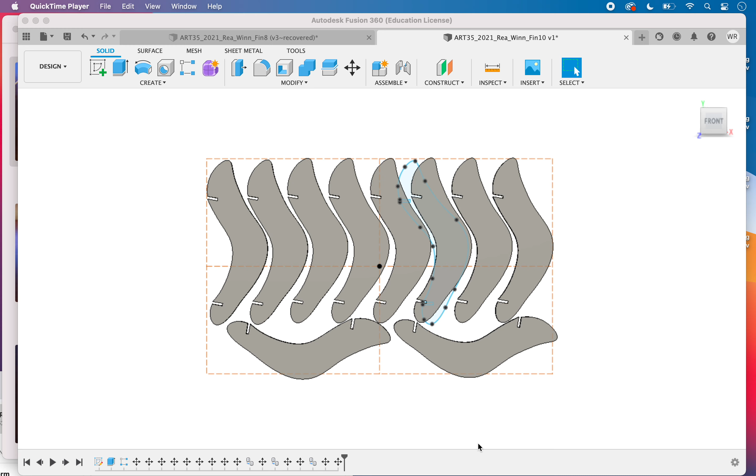The last time we were working together, we patterned the fin unit. We made 9. I've added a 10th, and I do recognize we're a tiny bit over the line, but I'm hoping there's enough margin that the laser cutter will still be able to work with that. Let's go ahead and start taking this digital model and prepare it to become a physical model to be cut out on the laser cutter.

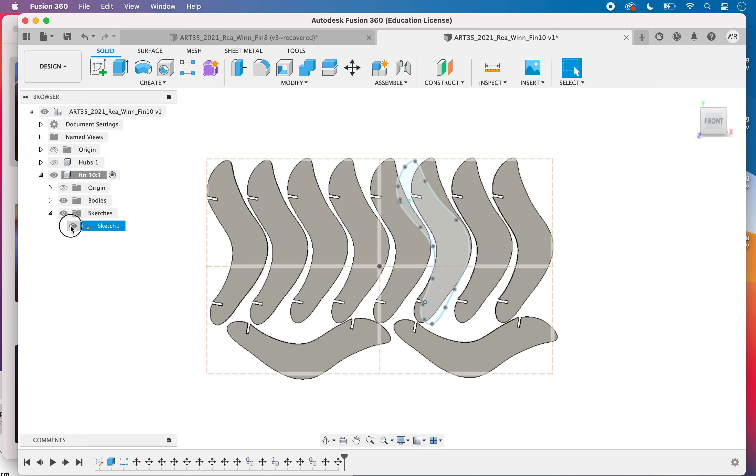So first of all, I want to come in here and drop down any layers and turn off the sketch so that it makes it more clear for us as we move into the manufacture space. So here in the manufacture space, you will see we have setups, and the first thing we'll do is do a new setup.

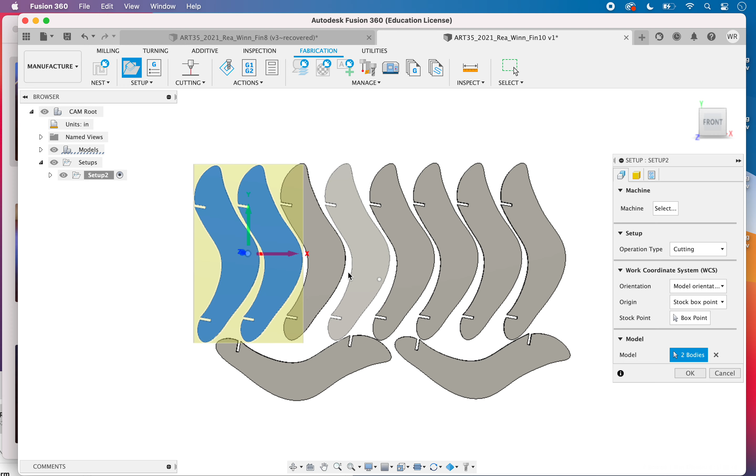And we want to verify the operation type is for cutting. And we'll come down and say which model do we want. We'll click on each fin. And then we need to go to stock, and where it says stock offset, let's say no additional stock.

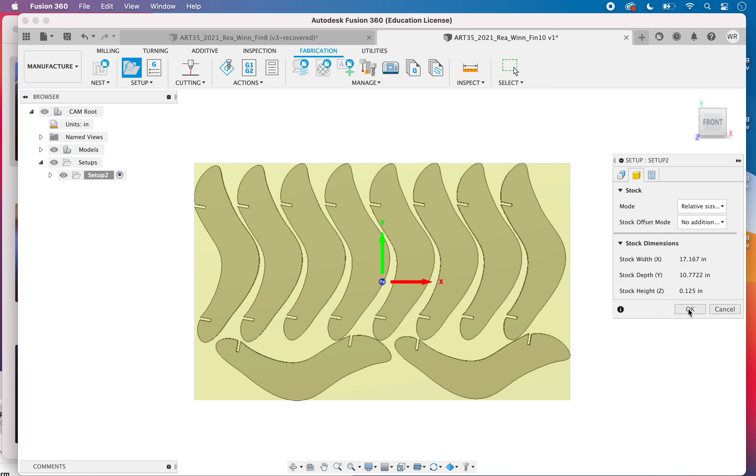So it verifies it's 0.125 inches thick, and that's the size that we're going to be cutting in, just a little over 17 inches and just a little over 10 and a half. We're up at 10 3/4 there, but I hope we can squeeze through.

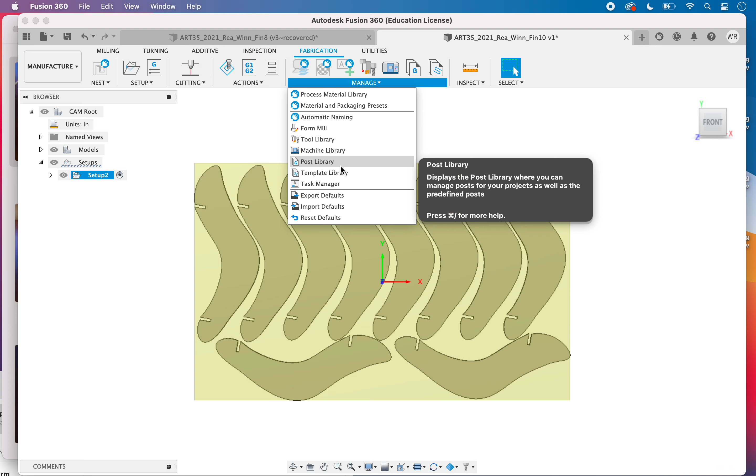Next, we're going to need to use a cutting tool, but before we can use a cutting tool, we have to define the cutting tool. So let's go into Manage, Tool Library. So here, under Documents, we can click in the current document where we want to be, click the plus sign, Laser Cutter, and we'll put a little GF for Glowforge laser,

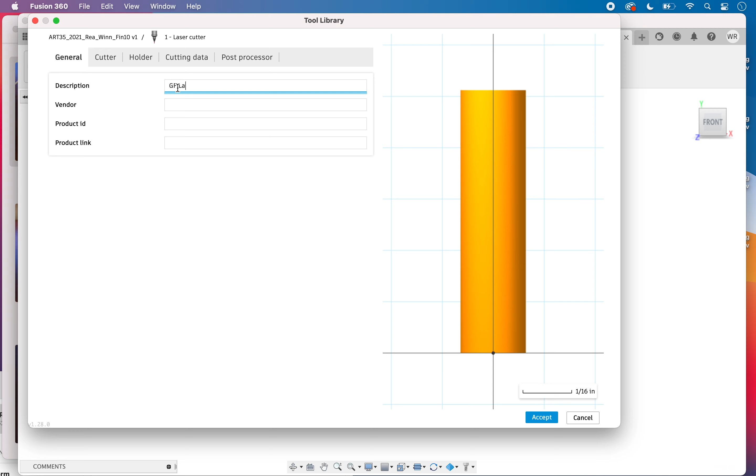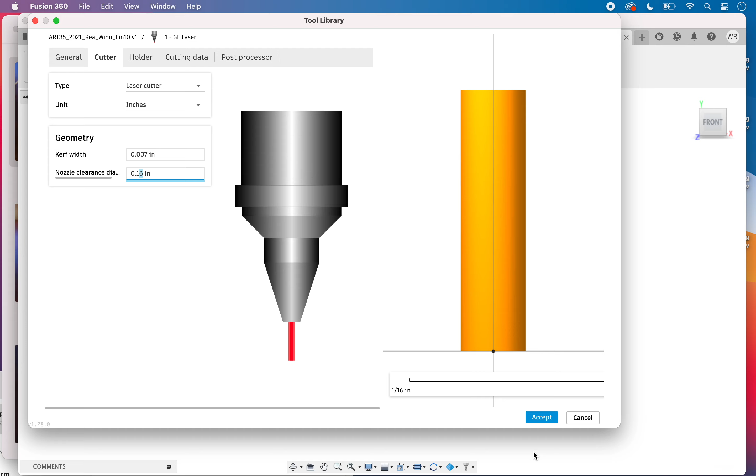and click on the cutter tab, and for the kerf width we need to say that it is 0.007 IN for inches. And then the nozzle clearance, we can just leave that as the default setting. Let's accept that.

Now we have a tool defined so that when it's time to come here to cutting, we can now click on Cutting, 2D Profile, and now we need to select a tool. So we'll click on Select, and we can pick up that Glowforge laser that we did define, and we'll select that. So this is the Tool tab. We're going to go to the second tab and click on it for Geometry.

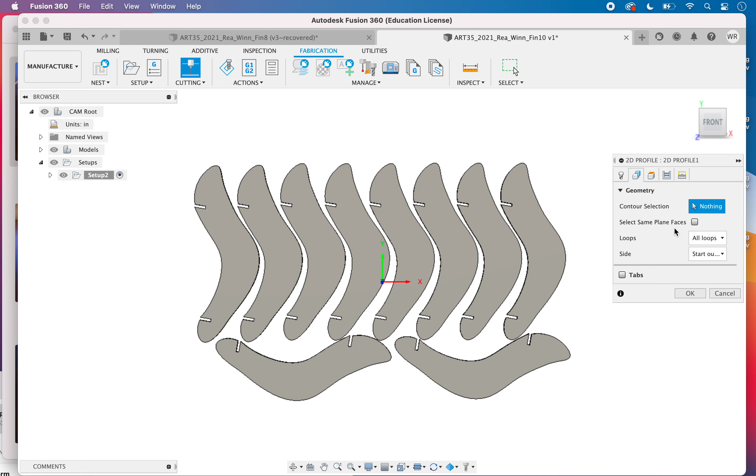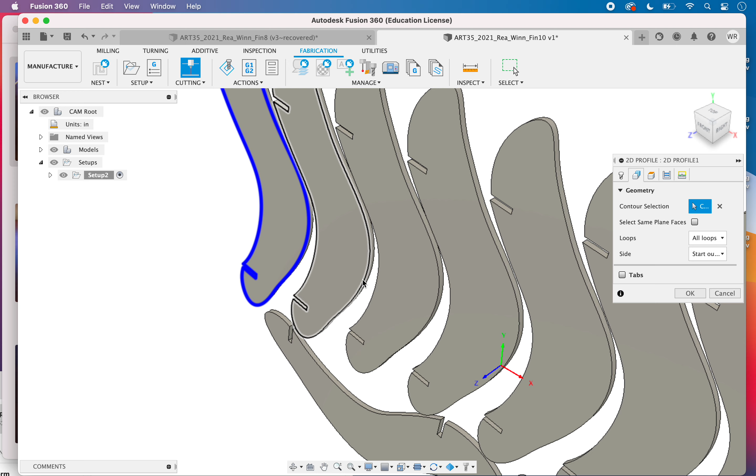And right now there are no contours selected. When I'm going to select contours, I like to have this sort of on an angle. So I clicked the home button. I'm zooming in because, can you see, we can select the front or the back. So please be pretty precise when you're selecting. I'm going to scroll till I get that front edge. So I'm going to click there, there, and keep going along, selecting the front edges.

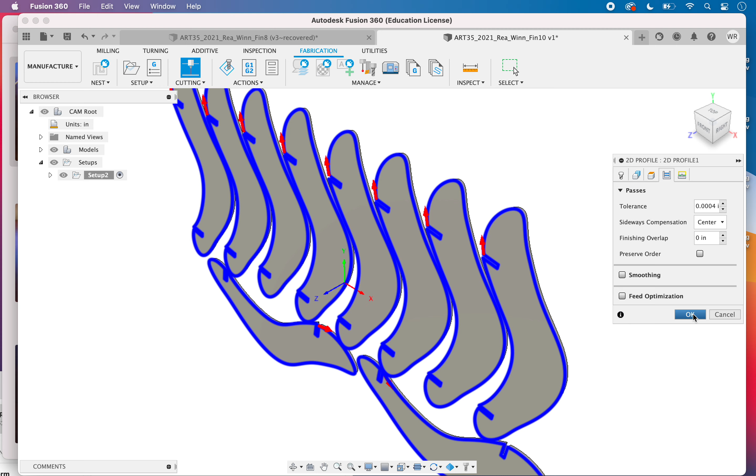Great. So we have 10 pieces of geometry selected. And now I'm going to come to this fourth tab called Passes. And in here, I'm going to select Sideways Compensation equals Center. And we'll click OK. So it's thought about all of that. And now if you want, you can come over here.

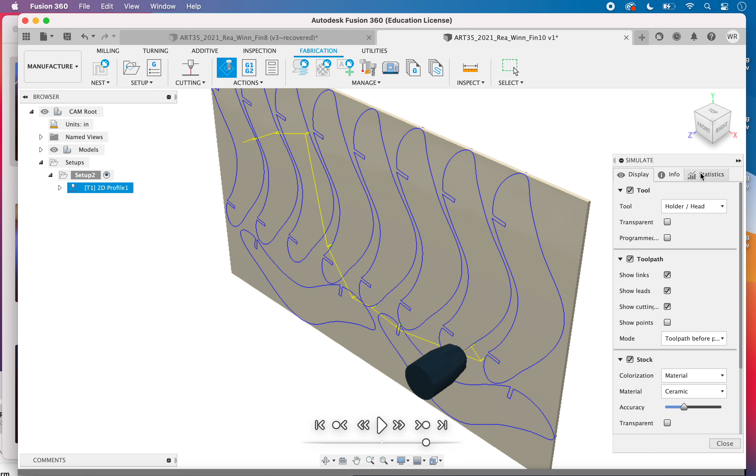This is the Simulate. And you can watch a simulation of the paths that are going to be cut out, and that's always useful because it verifies it's picking up all the pieces that you want to be cut. And it's also helpful because you can go in here and you can see it's going to take 5.5 minutes to cut those pieces out.

So we're nearly finished here. We've got our setup and we've got a 2D profile cutting path. And the very last thing we're going to do is send out what we've prepared in an SVG format that Glowforge can recognize.